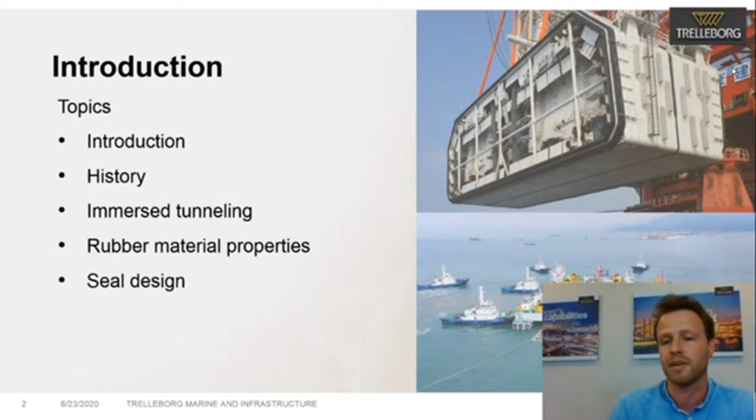So, Trelleborg Group is quite a big company. It's the world leader in engineered polymer solutions. It was founded in 1905. It has about 24,000 people working for it. So it's a rather large company. It's represented in over 50 different countries and has over 120 different manufacturing facilities.

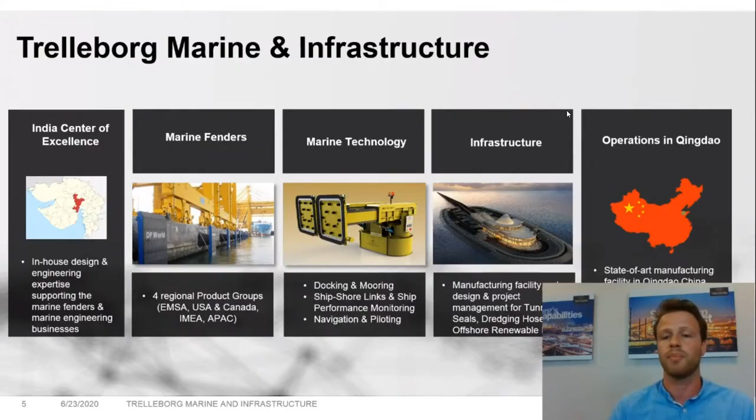I'm not sure what your geographical knowledge about the Netherlands is. That's why I showed a big map of the country. And the company of Trelleborg Ridderkerk is located where the big red arrow points at. It's basically located at the perimeter of Rotterdam. And the business it entails has to do with immersed tunnels, underground construction, energy, dredging, water management, and noise and vibration businesses. So we have been here already for more than 140 years,

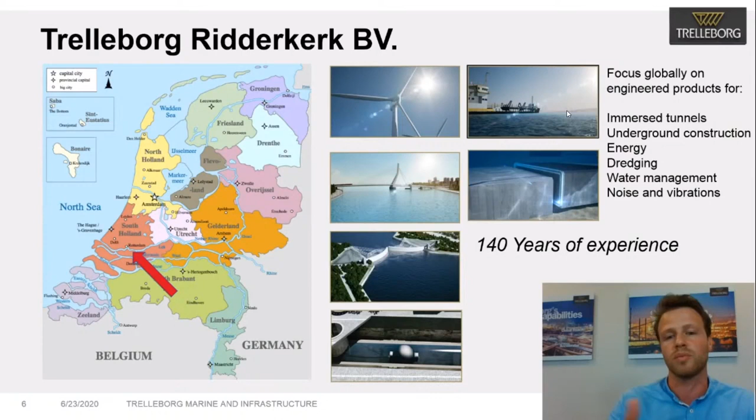so we have quite a lot of experience. And on these pictures you can see some key projects we've been involved in. So that is, for example, immersed tunnels on the right side, the storm surge barrier, and you can see the Erasmus bridge where we created the bearings for.

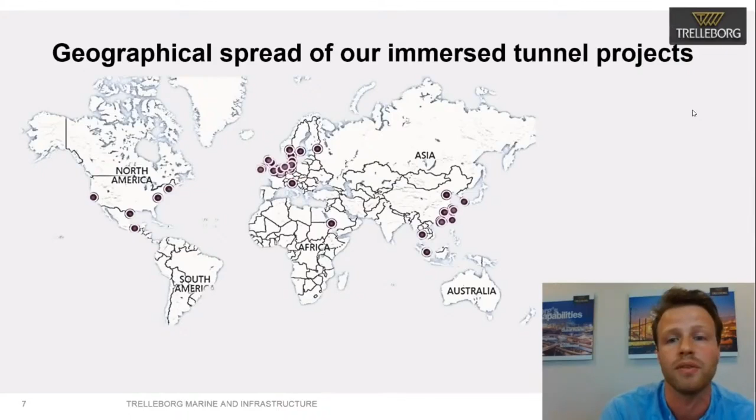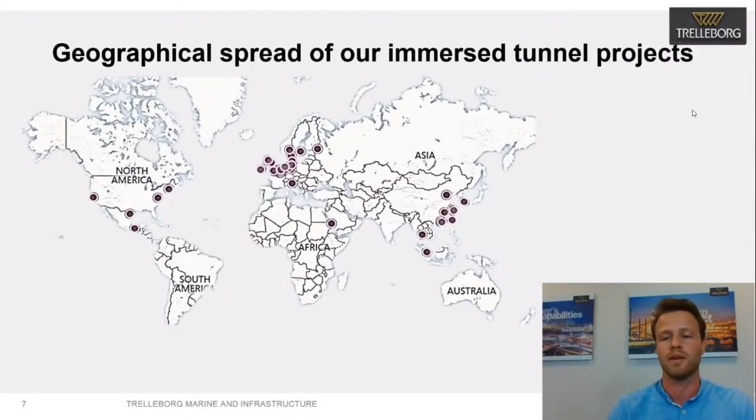The immersed tunnels we have been part of, that we actually delivered our products for, can be seen in this geographical spread of the immersed tunnel projects. You can see that there is a large concentration of immersed tunnels happening in Europe, but also in Asia. There's also quite something going on over there. And we see a small concentration in North America. So those are the three major markets that use immersed tunnel technology.

So let's dive a bit into history. It all started out with the Thames Tunnel. I think a lot of people already know about this tunnel, which is quite a famous one. It was the first time that there was a need to build a tunnel under a waterway, which was the Thames. So back in the day, London was a big metropolis.

There was a lot of business going on, and there was a need to cross the waterway in order to arrive at the docks. However, a bridge was not suitable for that application, as it would stop the sailing boats from entering the city. So they needed something else, and that's why Marc Brunel first made a tunnel under the Thames, under a navigable waterway. However, this was still a bored tunnel, so it was still not the beginning of immersed tunnel construction.

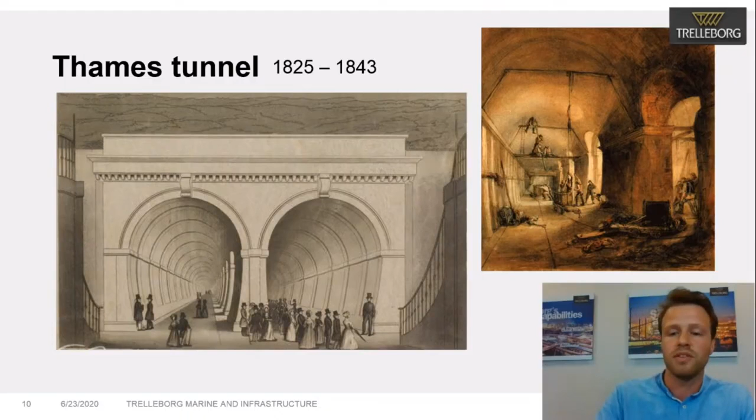That started around the same time, in 1810, by Charles Wyatt. These pictures over here depict it quite well. The idea was to create a brick construction, a brick capsule, and lower that into a trench. The idea was to interconnect those capsules in a row to make one big interconnected tunnel on the bottom of this waterway. However, this was never put into practice due to various reasons.

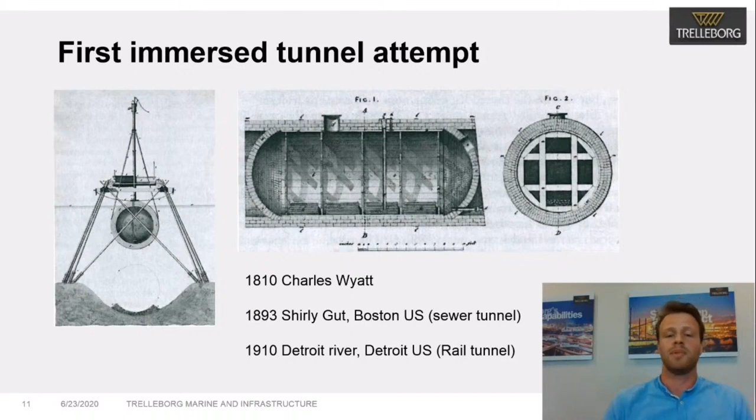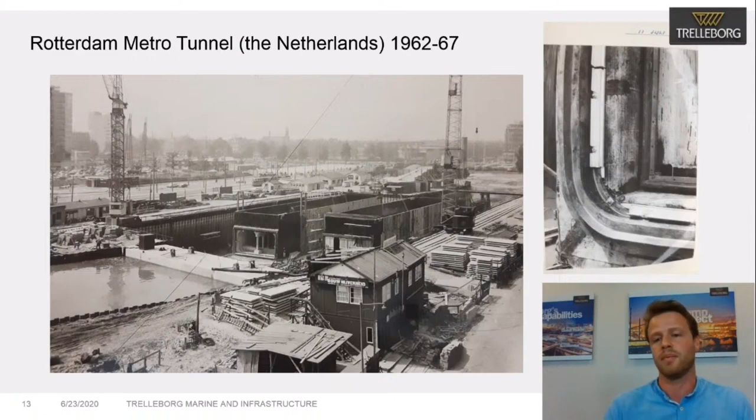The nice thing about the story is that during renovation work, we received some samples of the Gina seal gasket and other rubber products back from the tunnel owner, which provides us very valuable information about the lifetime and the rubber qualities over time when you place them into a situation like this for more than 50 years. So I will come back to this Gina profile and the properties of the rubber material that it has after a certain amount of time.

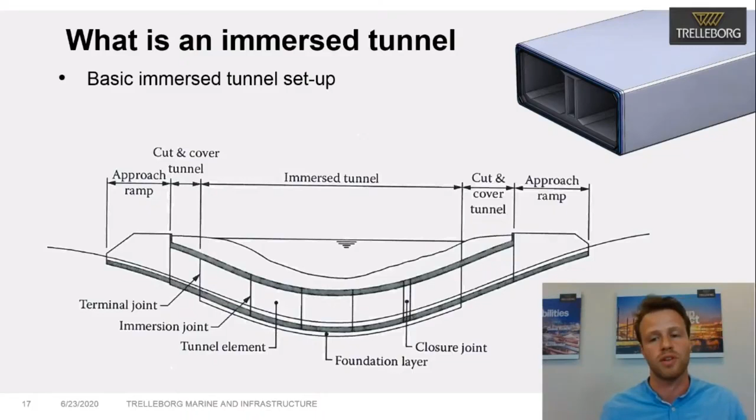At the corners of those cut and cover tunnel parts, you will see a ramp area, and those parts are being interconnected with the existing infrastructure or the infrastructure that's going to be built later on. So now the question arises, why actually build an immersed tunnel? Because there are so many other options to cross from point A to point B, obviously. Well, it depends on what your situation is. But there are a lot of advantages for immersed tunnels that speak for this technique.

At first, it's very suitable for short, shallow crossings in soft soil. Also, the shapes are very flexible in dimensions, because you can just lower different types of cross sections. And if you want to provide a tunnel that has different lanes, you can do that. You can just construct a 6-lane cross section and lower that into the trench. And you can also change those 6 lanes to an 8-lane or less, obviously. That's something that cannot be done so easily with a bored tunnel construction.

Another advantage is the land reclamation opportunities it provides, because you have to suck out land in order to make the trench in which you place your immersed tunnels. This land can be used simultaneously to create artificial ground or artificial islands in the surrounding area. And last but not least, it can be economically very feasible to use this kind of technique. So mostly these techniques are used in areas where there's a lot of water, a lot of urbanization going on, and the soil is a bit softer than usual. So keep this technique in mind when you are designing for these kinds of circumstances.

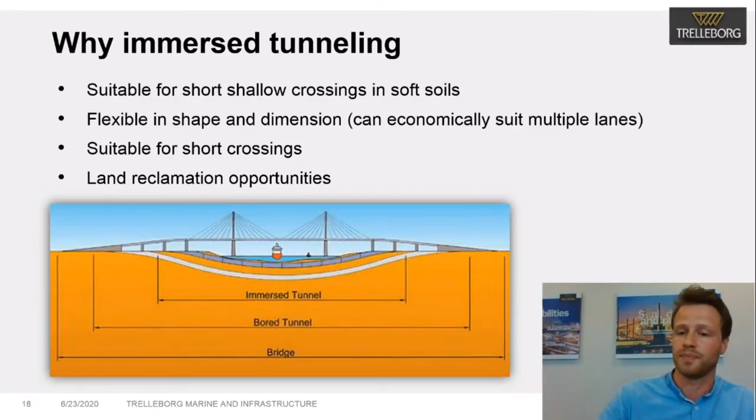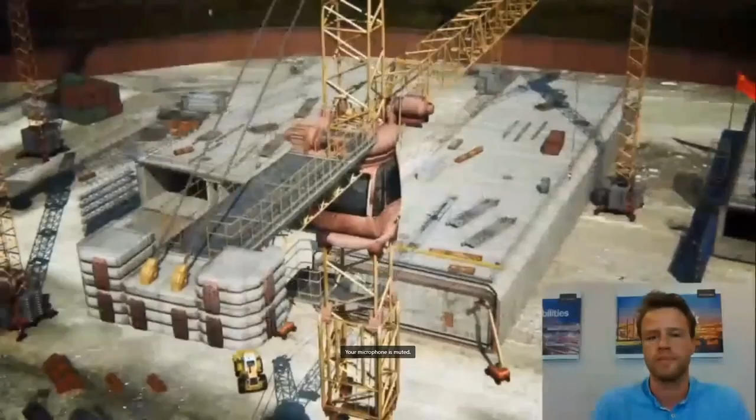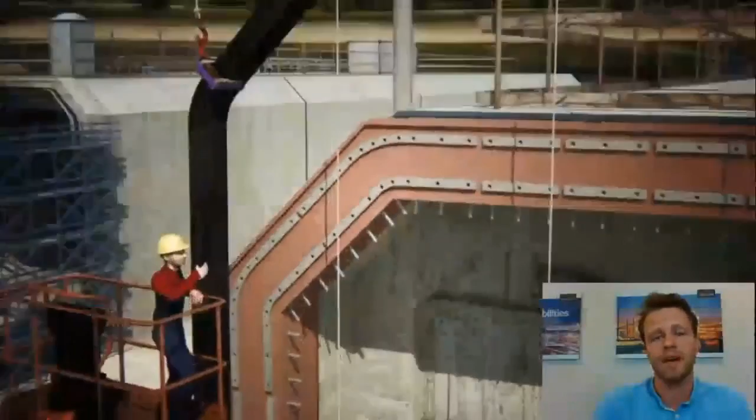Now I will show you a short movie introduction of the immersed tunnel technique that will hopefully clarify everything I just said. So here you can see the building. So the big Gina seal will be installed on the dry dock by clamping it into place. So you will use steel end frames, steel clamping systems to make sure the Gina seal will stay in place. You bolt it down together, provide enough clamping force in order to make sure it stays in place.

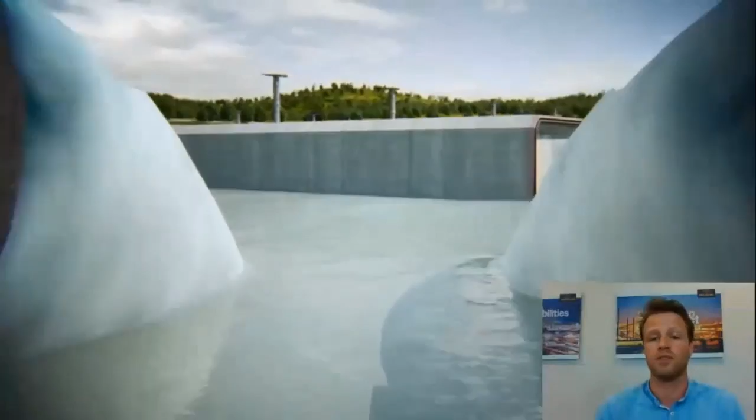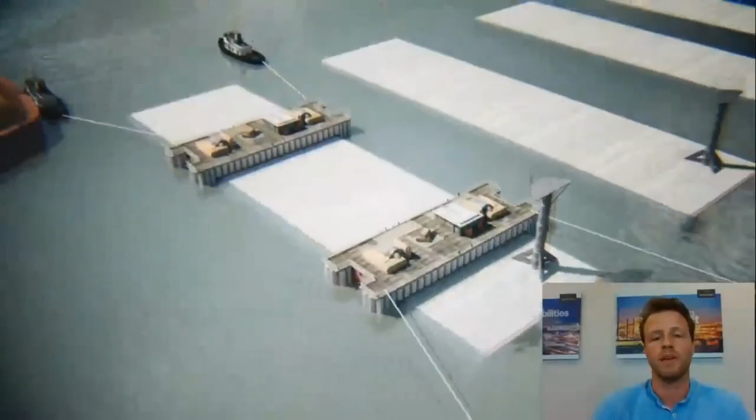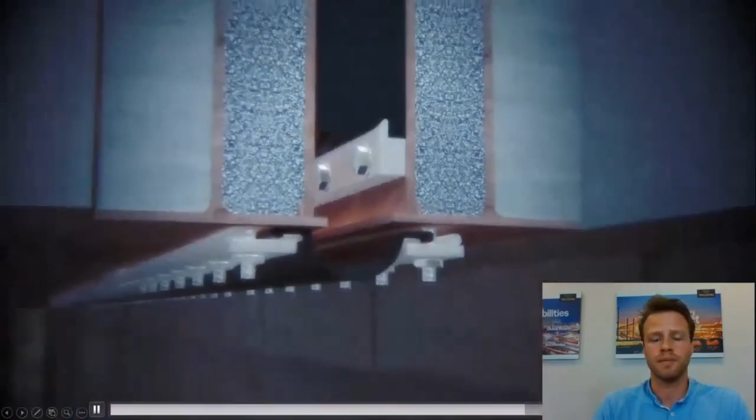So here you can see that, obviously. There is more compression. Now we can see the omega seal being clamped into place, which is basically the secondary sealing solution. And many more are to follow. And when everything is done, you will see that an infrastructure is being created.

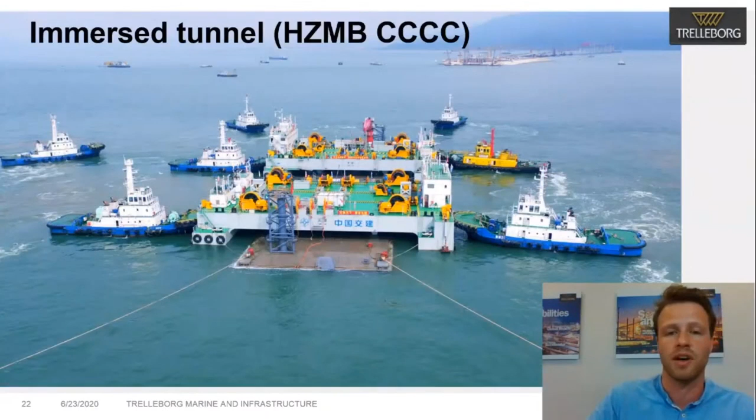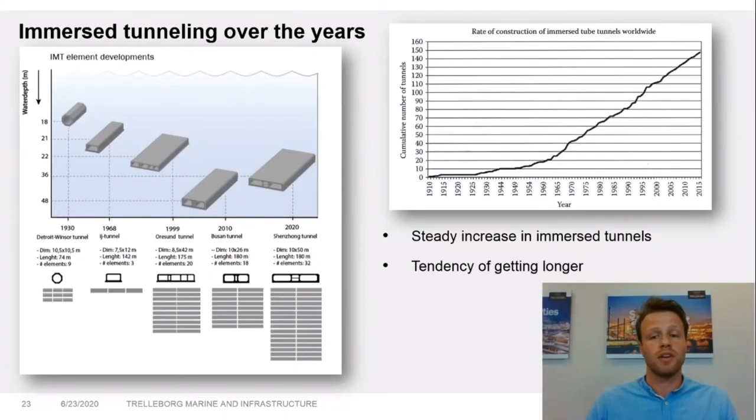So what can we see about immersed tunneling over the years? A lot of trends are being recognized at this moment. On the left side, you can see one of the first immersed tunnel elements constructed during the Detroit-Windsor tunnel connection. They tended to be way smaller in size, but also in number, because when you would cross such a waterway, there were a limited amount of elements being interconnected. But nowadays you can go as long as 32 different elements, and those elements tend to be wider, longer, and higher as well. At the same time, we see a steady increase in immersed tunnels. On the right graph, you can see a very linear progression in terms of new immersed tunnels.

So there are different types of immersed tunnels, because at the Detroit-Windsor tunnel we saw that the first immersed tunnel was a steel tube type of immersed tunnel. But in total you can say that the concrete monolithic type of immersed tunnel is way more popular. It entails more than 50% of the total amount of immersed tunnels. And this technique is mostly used in Europe and in certain parts of Asia as well. It kind of depends on what the requirements are. Sometimes political pressure is also of huge influence in the decision making for these different structures. You can imagine if you're living in a country where the shipyard industry is very big, that there is a big lobby to make these immersed tunnels with steel shells.

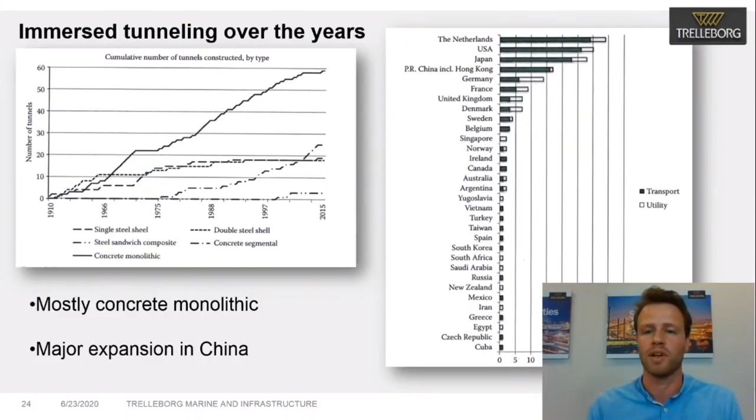Sometimes things go wrong when you construct immersed tunnels. That's obviously not something you want to happen, but calamity is not a stranger to us. We have experienced different types of calamity in the past, and we do not run away from it, but we like to learn from those mistakes.

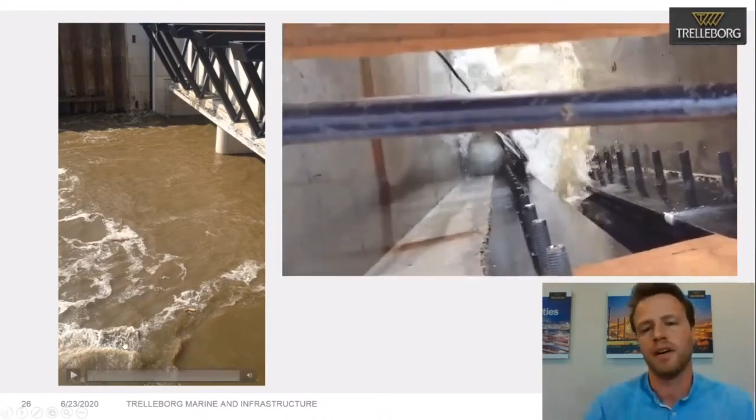So here you can see my colleague, who is in a building construction, and an inflatable type of seal was not performing anymore. So the whole construction site started flooding with water. There was just a combination of different things going on at the same time. Yeah, hopefully nobody got injured that day.

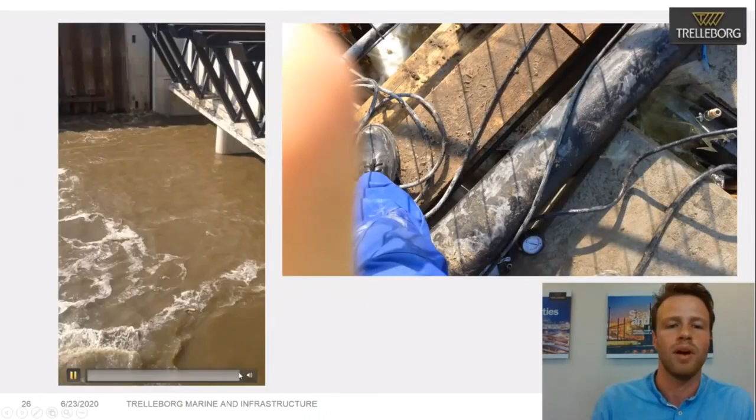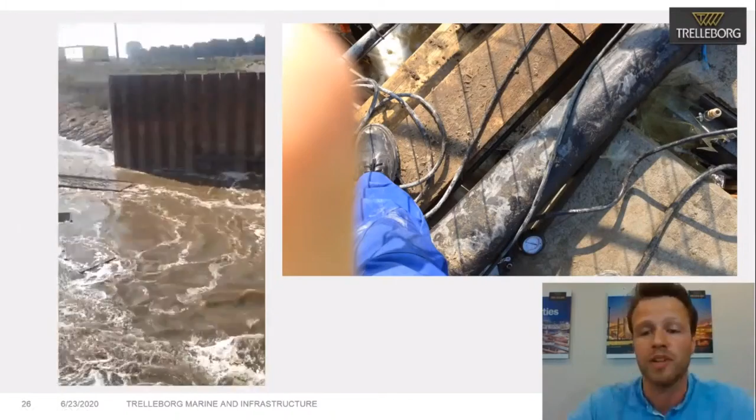However, this obviously has a lot of financial consequences when something like this happens. Eventually, everything worked out fine. We worked together with the contractor and the other parties involved and found the best solution for this small disaster, you could say.

Calamity is also not a stranger back in the days. During the construction of the Thames tunnel, there were 6 different floods. During the second flood, there were even 6 deaths reported. And there was a lot of skepticism back in the day, whether it was even possible to cross such a navigable waterway. Fortunately, people just continued pursuing this type of technique. So that's the reason we are here today with the tunnels we have these days. So we should be grateful for that.

So we talked a lot about steel and concrete. Now let's see how rubber fits in this whole story. When you design for immersed tunnel projects, there are a lot of different environmental impacts that can have an influence on your joint design. At first, for example, when you start building an immersed tunnel in a high seismic area, for example in Istanbul, you have to take into account that there can be a lot of dynamic activities influencing your seal. So you have to make sure those tolerances are lined up with your design.

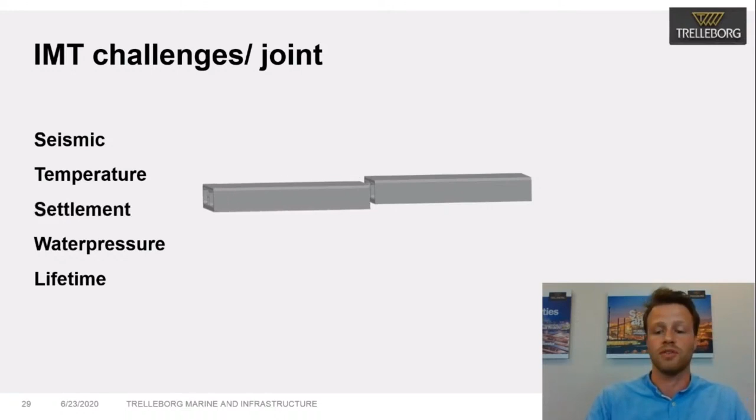Also, when designing with concrete, those elements tend to expand and retract over their lifetime, which are also tolerances you have to accommodate in your design. Ground consolidation over the years has a huge impact on your joint design too, and at the same time you will have water pressure that ranges from high tidal pressure to low tidal pressure during its lifetime. When you design a tunnel for 120 years, you can imagine there's a huge range in water that it has to accommodate. As I mentioned, a general lifetime lies between 100 and 120 years for these kinds of tunnels. It depends who the tunnel owner is.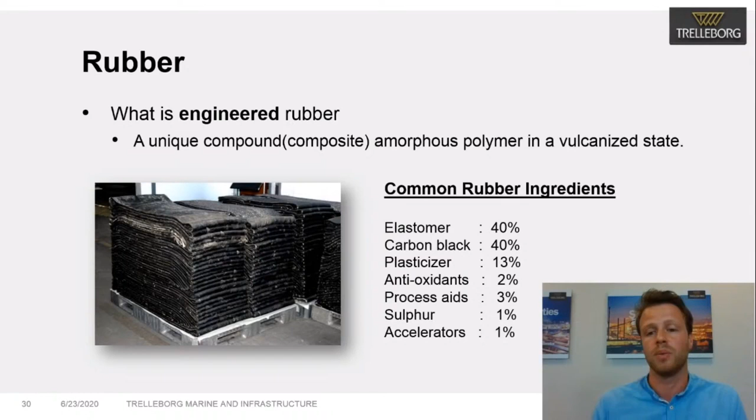Sulfur is needed to make sure everything can be vulcanized. It basically functions as an accelerator, but you can combine it. It's basically a recipe for the things you want to build. If you want to build a rubber that's resistant against ozone, you probably need different ingredients. If you want something that is resistant against oil or gas or something else, you will need a different type of recipe to come to the right compounding.

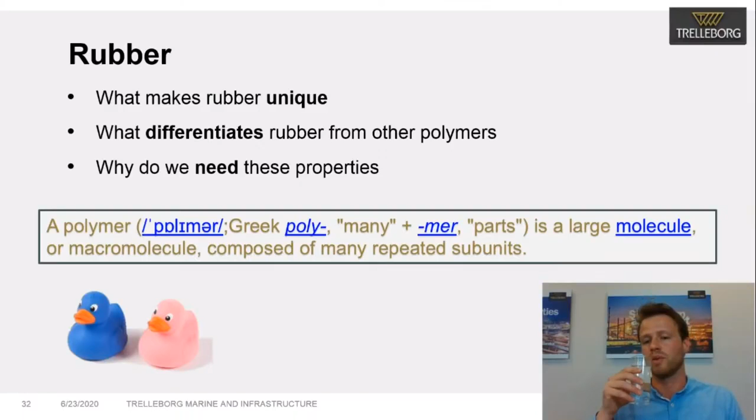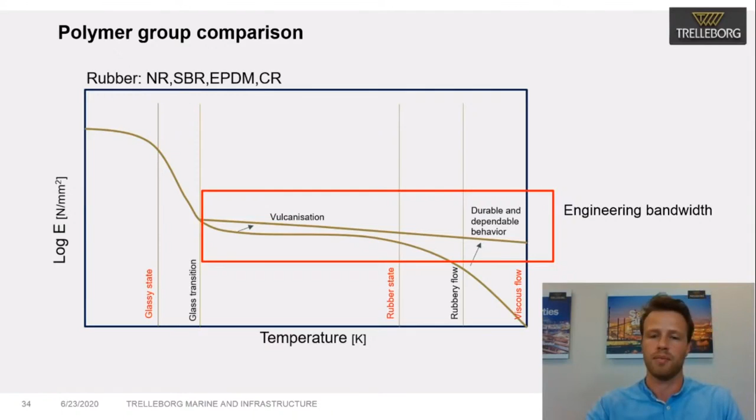So here you see the engineering bandwidth of a vulcanized piece of rubber. It's quite a big range. And there are also some other rubber characteristics you have to take into account because it's a very unpredictable material at the same time, which means it's a viscoelastic material. In other words, it does not behave like Hooke's law. That makes it at the same time very difficult to perform FEM analysis on, for example.

A few of those material characteristics are being displayed over here. On the right side, you can see the hysteresis happening in a rubber material. If you see that the stress rises at P0, it starts rising to P1. And then when there is an unloading of your compression, you see that the stress and stretch ratio differs. So the energy is being dissipated within the material.

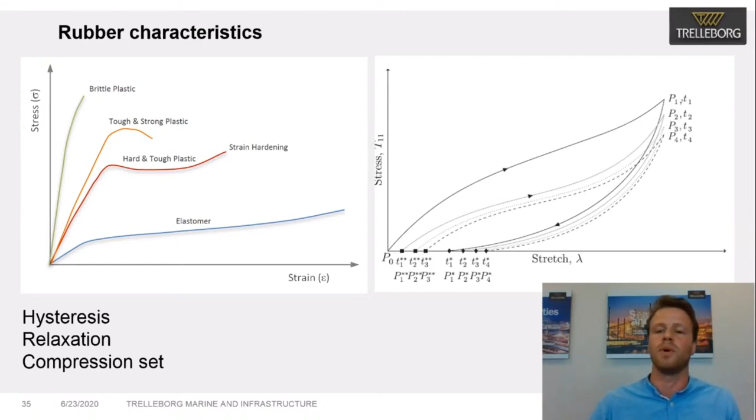The compression set is also something that influences the material of rubber, which means if there's a dynamic compression of the material, the rubber does not go back to the same position it originally would reach, which means the material behaves differently than originally was anticipated. Also, relaxation takes a huge part in its unpredictable behavior, which means when you have initial compression of your Gina seal or another type of seal, the stress will lower over its lifetime. So those are all different types of characteristics you have to keep in mind when designing for these kinds of purposes.

We have, for example, the NEN standard in the Netherlands, but you also have the DIN standard in Germany. You have the GB standards in China. They're all different, and you can play along with that. So if, for example, one manufacturer of seals complies to certain parts of norms, in order to compete in the same business, you also have to comply to their standards. So you can say it's a quality assurance tool, but also a strategic tool at the same time.

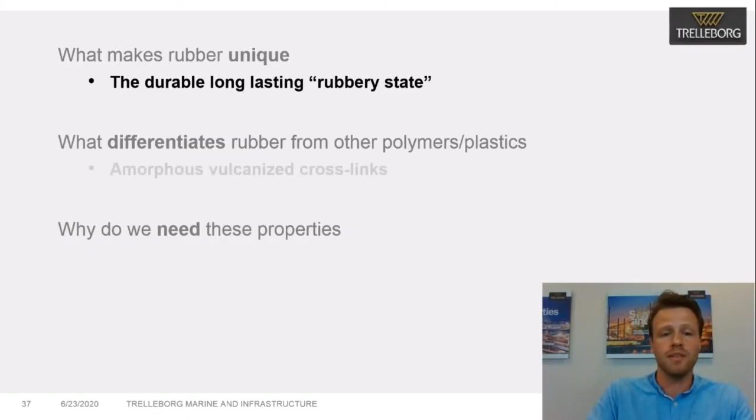A small recap. So what does make rubber unique? It's mainly its durable, long-lasting rubbery state that is being created due to its amorphous vulcanized crosslinks. And that will create a very dependable, very predictable, reliable building material that can be used to make these concrete steel constructions watertight for a very long time.

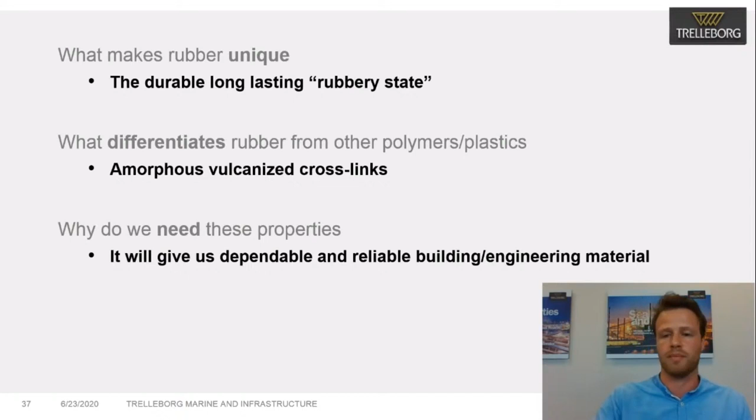So it's time to get a bit more practical. As I mentioned before, those tunnel elements are being constructed on land, and they will be lowered into a trench. So on this picture, you can see tunnel element number 1, tunnel element number 2, and number 3 as well. Those small vertical lines being displayed are the segment joints, and the bigger one with a red dot around it is the immersion joint. If we zoom in a little bit more, you can distinguish 3 types of seals, number 1, 2, and 3.

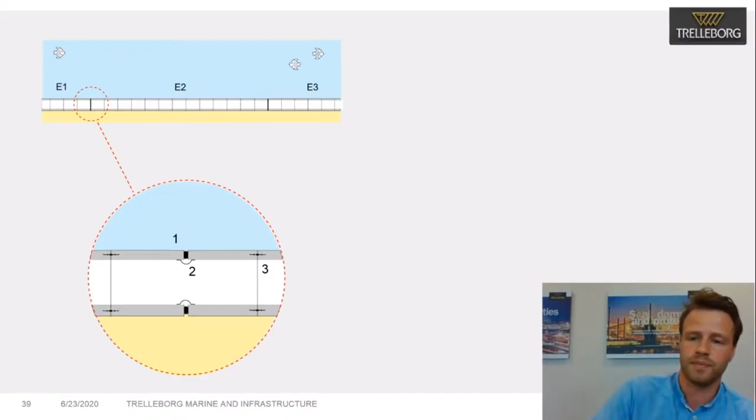So we have the Gina Profile, the Omega Profile, and the water stop. Maybe you can give one to me. Yep, here we go. So this is one of the big guys, the Gina seal. We have a membrane seal, so this is basically not a compression seal. This seal will be constructed on the inside of the tunnel construction.

Then, number 3 is the water stop, which is a joint you will pour into the construction, so if you construct it well, it's not visible at the end anymore.

Yeah, nice, what's that? For at home. Yeah, for at home, exactly.

It's a smaller version of this Gina Profile. As you can see, it has a tiny hole in it as well. That is meant so you can produce it easier due to less vulcanization time. And at the same time, you will create easier initial compression because it behaves differently, obviously.

So the Gina Profile, the big one. You can see that the Gina Profile started out rather small and developed over the years. So you can say it becomes bigger and fatter over the years, just like human beings. And it actually follows the same trends as immersed tunnel construction. You already saw that immersed tunnels were getting wider, longer, and deeper, and the Gina seal design follows these trends.

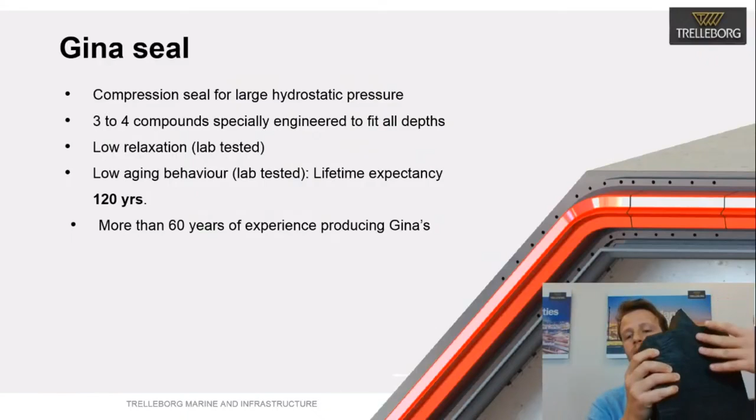So the Gina seal basically contains multiple types of compounding. The Gina over here looks like one big part of rubber. However, the nose often has a different, lower type of compound than the body. And the flange often has the highest type of compound because you want it to be hard to clamp it in the right position, whereas the nose is lower in shore hardness to create a bigger compression during initial compression.

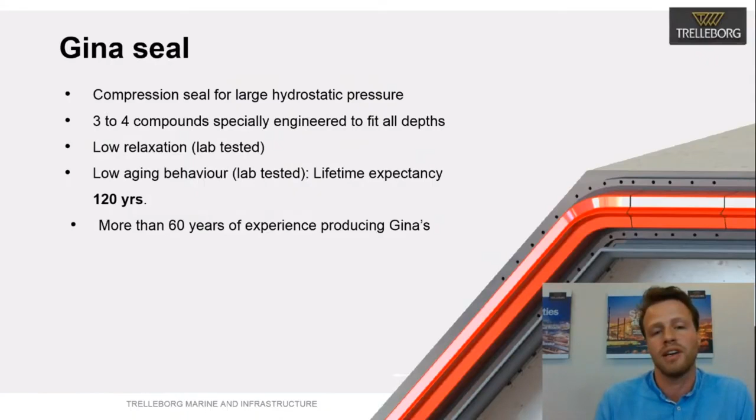So we have 60-year-old samples of Ginas, which is useful, obviously. And we design these compounds with low relaxation because that has a huge influence on the performance of these seals.

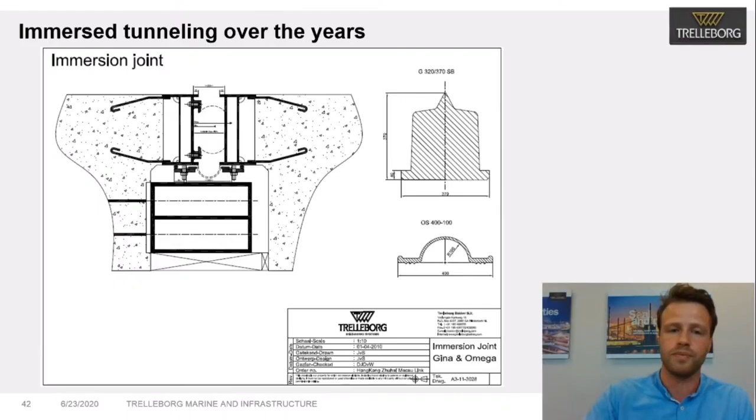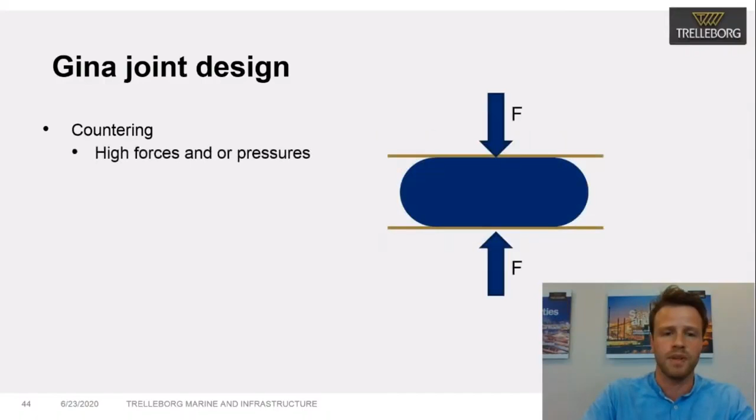So what does the Gina seal need to do? At first, it needs to accommodate a lot of compression, high forces and pressures. Then you have large transition movements that have to do with the settlement I was talking about, so these side deformations too. Apart from that, there's a lot of durability and environment that it has to deal with.

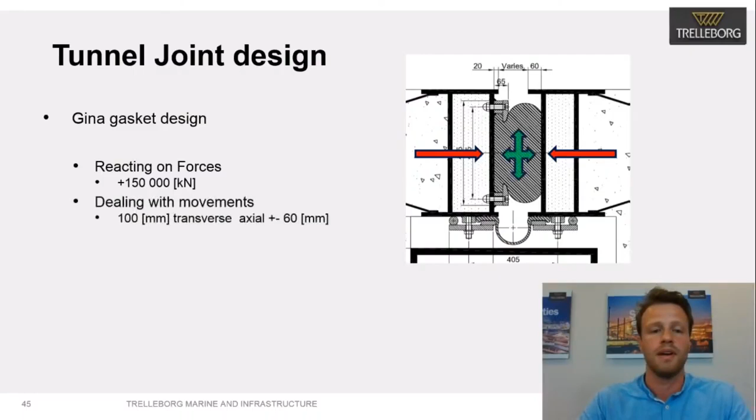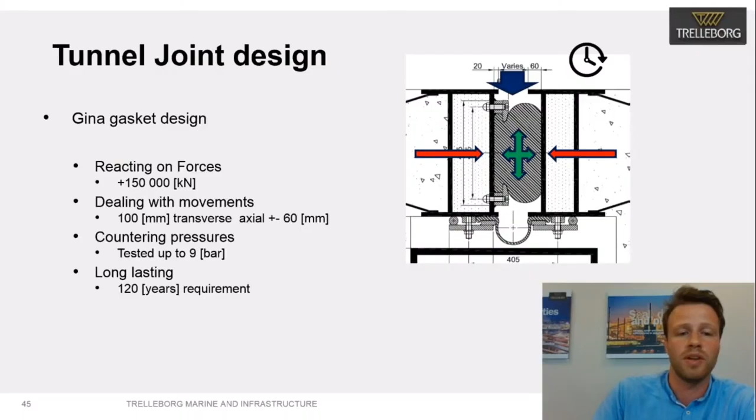So to put it into perspective, these are typical forces you have to deal with. We're talking about 150,000 kilonewtons of compression that it has to take. It needs to deal with about 100 millimeters transverse axial deformation, mostly due to settlement. And we have tested these seals with pressure up to 9 bars. We never reach 9 bars; the deepest immersed tunnels mostly range between 20 to 45 meters in total. Last but not least, the lifetime requirement.

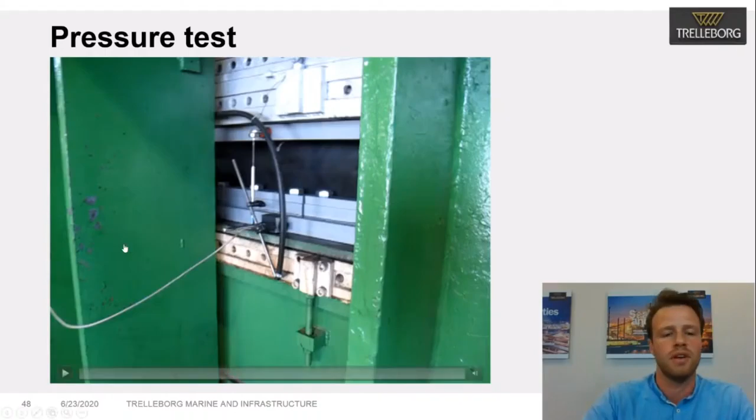So on the right side, you see a press. The Gina mock-up is placed under the press, and it's compressed by the amount of compression you want to have. Within this construction, the pressure will start getting higher. In the meantime, the pressure builds up in this construction, and the small leakage is visible.

And there it goes. So as you can see, a lot of force is going on when there's a leakage occurring. So that's definitely not something you want to stand in front of.

So this is another type of compression test. The one before is just a regular one where you compress the seal in the axial direction. However, in this situation, for example, the client created a different type of steel end frame in which the plate was slightly tilted. So in this construction, we did the same type of performance test. We create documentation to accompany this type of tests to give comfort to the client.

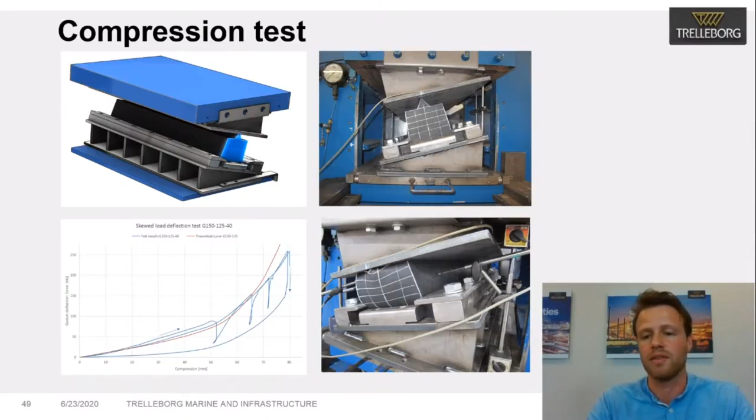So you can imagine you can create all different types of setups and ranging types of tests to make sure that you deliver the right product with the right validation accordingly.

So the Omega seal, as I mentioned, is a secondary seal. It's not being loaded due to compression; it functions as a membrane basically to cover up the joint. We also have 60-year-old samples for these types of Omega seals due to renovation works in Rotterdam. So that gave us a lot of information on how that particular seal was performing over the years. And we tested the seal for over 20 bars of force.

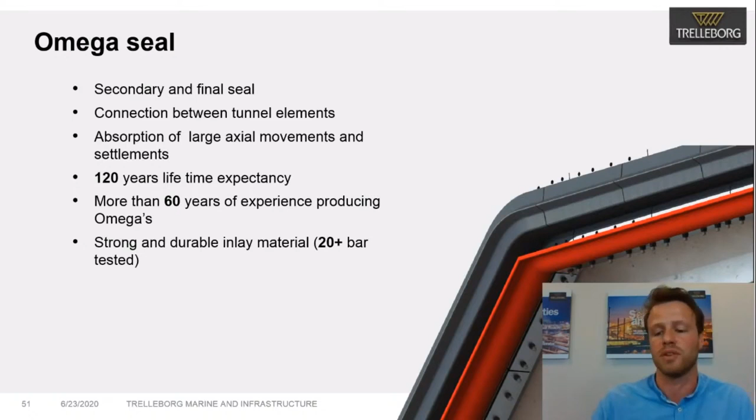So here you can see a typical cross-section of the Omega seal. On the graphic below, you can see the Gina seal being compressed, and the Omega seal is clamped in place later on. So what most of the time happens is that those anchors are already pre-installed on site, and when the Omega seal arrives on site, you only have to clamp it in place, and you have to determine what the clamping force needs to be to make sure that the Omega seal will perform accordingly.

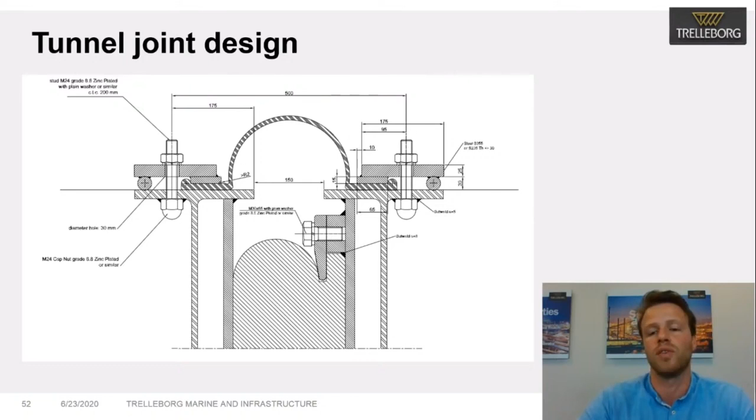And during the tightening of those bolts, you have to take into account the relaxation. So most of the time you have to retighten them after 10 days, after 2 weeks, and then most of the relaxation behavior is taken into account.

So those Omega seals are sometimes tested as well, especially when you create a special type of Omega seal. This is a type of construction you can use for that. You basically place 2 Omega seals next to each other, and you increase the pressure within those Omega seals to check where the failure mechanism is and to check how the clamping system behaves over time.

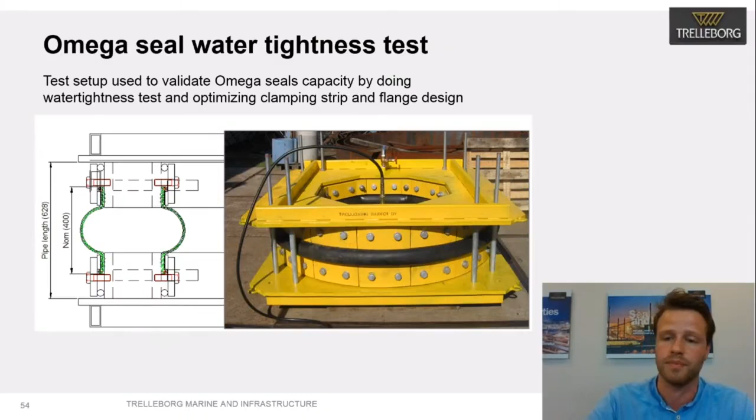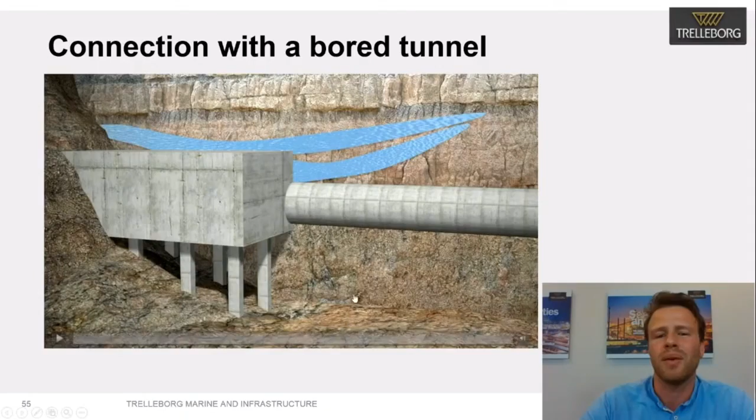I'm aware that in India there are not so many immersed tunnels happening. However, Omega seals can also be applied in different types of constructions, for example, in a station box tube connection. It's a very useful tool. So basically for very weird, complex transition areas, an Omega seal will perform very well.

Right. So the omega closure joint, that's a special type of seal. You don't see that often, to be honest. So in this case study I'm showing over here, we had to make an omega seal that had to cover 1800 millimeters in order to deal with the tolerances it provided.

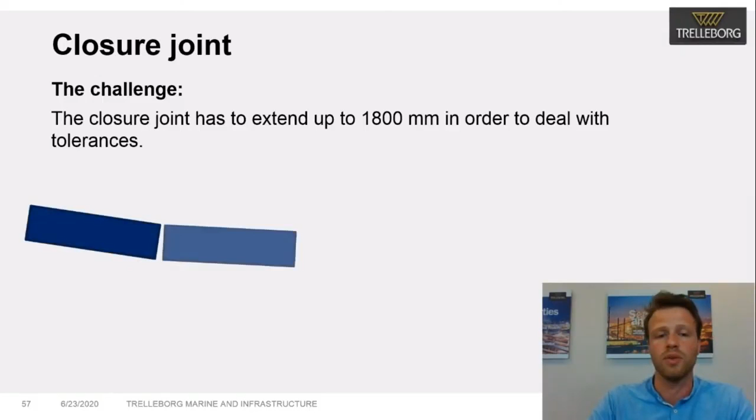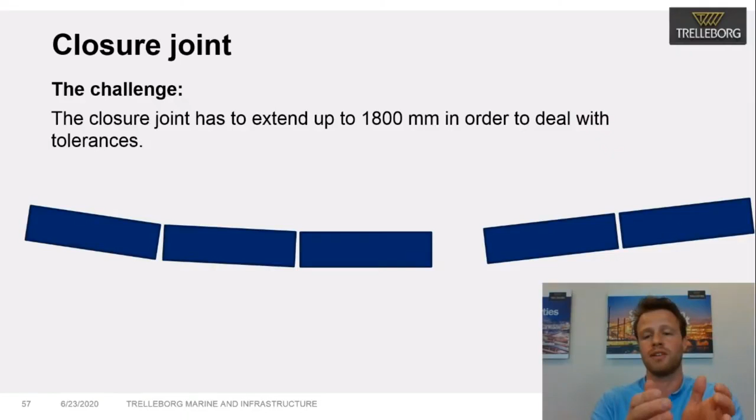So how does a closure joint work? When constructing an immersed tunnel, you will lower the elements accordingly. However, at the end, you will see that there is a stack up of tolerances that you are not sure about. And what happened in this situation, the client created a closure joint that could be extended in order to make everything fit, which is shown over here. This was the closure joint being constructed.

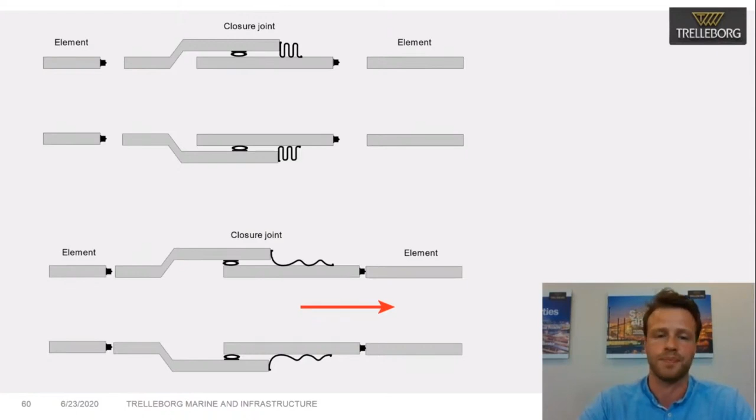And it needs to be rather long to make sure it can cover the movement of the moving structure. It was quite challenging for us as well to create these type of seals. Here you see the production of two different type of M seals. On the left side, you can see the bigger one, which in total was 1800 millimeters. On the right side, you can see a smaller version of that.

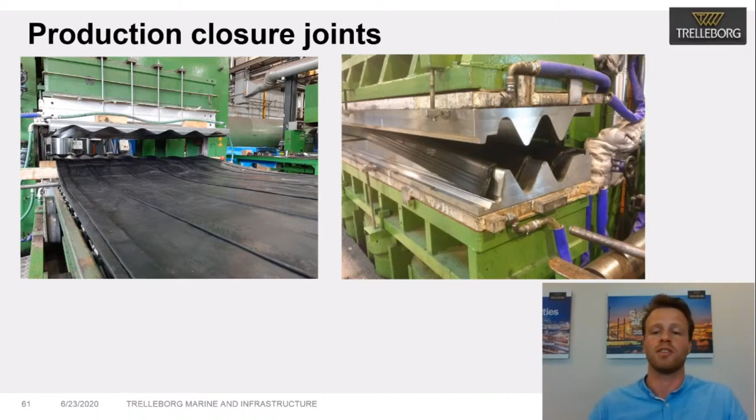So the sinus shape is meant to create the harmonic movement, but also production-wise, it's useful because if you can minimize the total width of the mold, you can minimize the costs. So that also works. So you create those sections ranging from 5 meters to slightly bigger, and you have to vulcanize those sections into place. So you will end up with a very, very long linear length of this seal, and then you have to vulcanize the corner sections to those linear parts.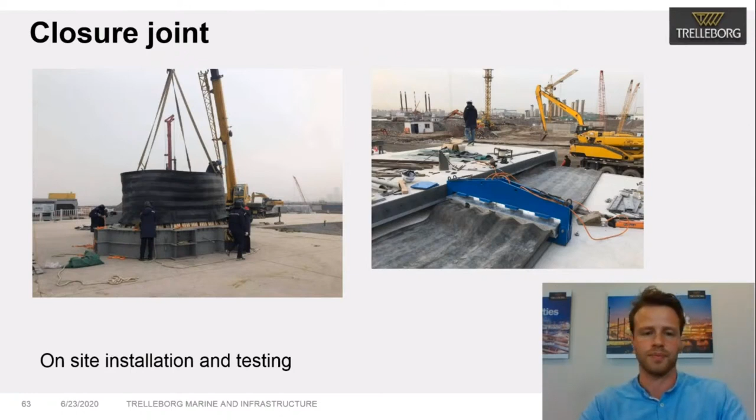At last, we have the cast-in seal, which is called the water stop. And the water stop is being displayed here in red. Normally it's not red, it's obviously black with steel. It's been poured into place. This type of water stop is tested up to 9 bars and has the same type of lifetime requirements as the other seals. And those seals are used where dilatations are required.

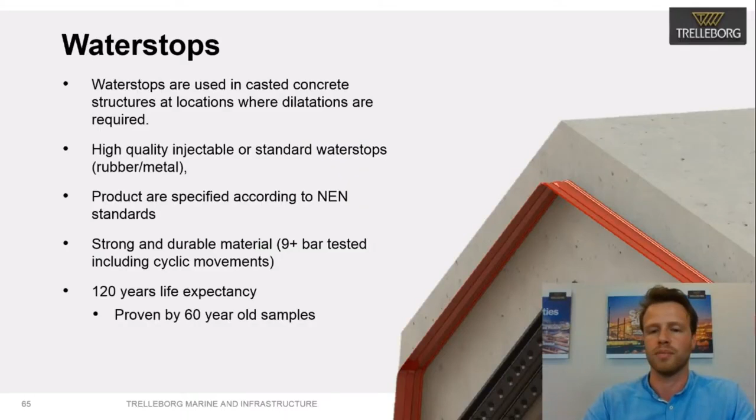So the worst case scenario of an immersed tunnel is often seen as a sinking ship. So when the ship goes down and lands on the immersed tunnel, you definitely want your structure to accommodate those movements in your tunnel. So this is the working principle of a water stop. You pour it in on one side, and after it cures, you pour the other side as well.

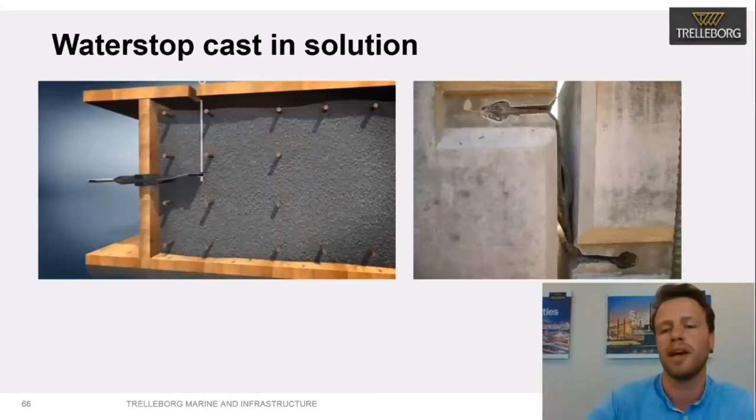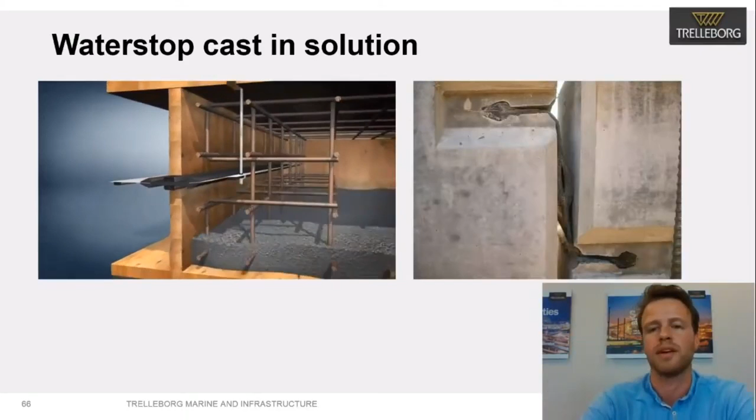On the right side, you can see that the water stop can accommodate a lot of shear movement too. This is definitely not a normal situation. In this situation, one of the elements started floating. So that's the reason why there's so much differential movement visible. This is definitely not something that's required or wanted. However, you can see how versatile the material is and that it can work.

Oh, what happened here?

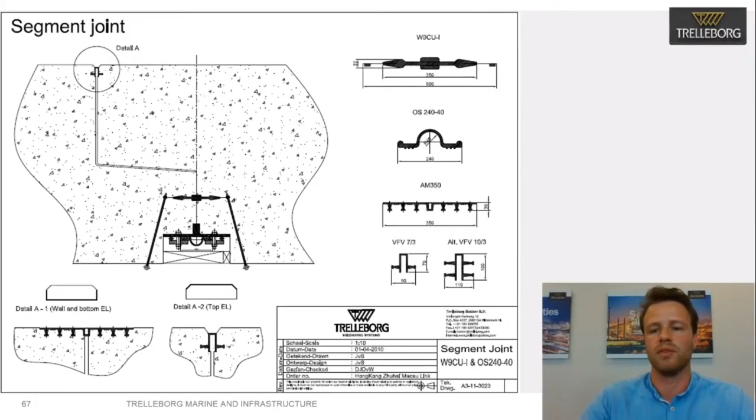So here you see the cross section of a typical in situ situation. Here you see the segment joint. On the lower part, you can see an omega seal being clamped into place. And as a secondary seal, you see a water stop being sunken in. It also often has other types of seals accompanying it. So in detail A, you see a smaller seal that makes sure the dirt cannot enter the seal. So there are a lot of different options you can use here.

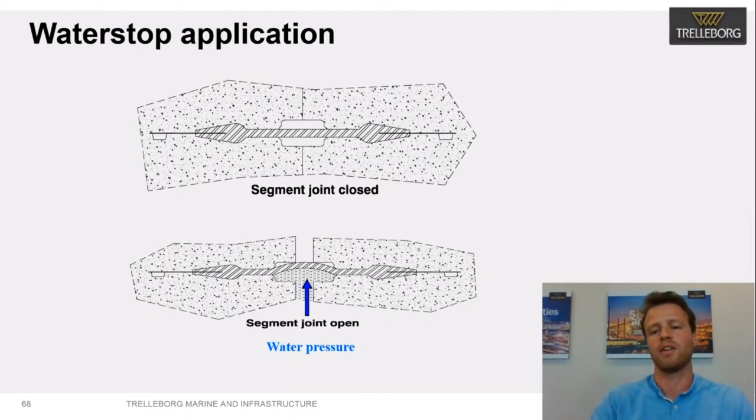So for the water stop application, this is what basically happens. You pour the water stop in, and when there is a movement, so for example, when the concrete starts expanding or retracting, you will create a small joint opening in which the full rubber material starts to create an arch shape due to the water pressure in that direction. So the water pressure causes this arch forming, and it results in a reducing radius and thus also in stress decrease in the material, which is useful. That's something you want to have.

With the water stops, there are some challenges involved, obviously. One of those challenges is the transport and installation of these types of products, because they're rather fragile when you roll them up in a reel, and when you have them placed in the construction site, they're easily torn, for example. You have to make sure that doesn't happen. Also, air entrapment is an issue. So when you place them inside, air gets under those constructions, and you can have air entrapment and small cracks. So we'll get back to that a little bit more later.

During the concrete expansion and shrinkage, you have a lot of elongation, also tensile strength within your water stop. As you also saw in the last visual, sometimes there's settlement going on, and you don't want your water stop to tear at that point. The rubber-metal bonding is also of importance. It has to do with the tensile strength that acts on this water stop, and you don't want your rubber rupturing from your metal.

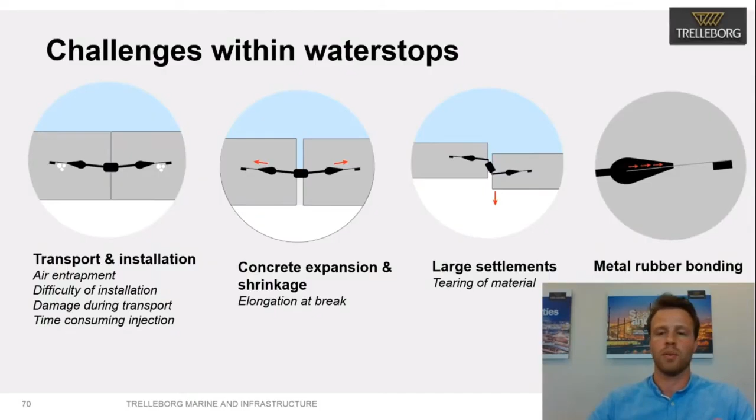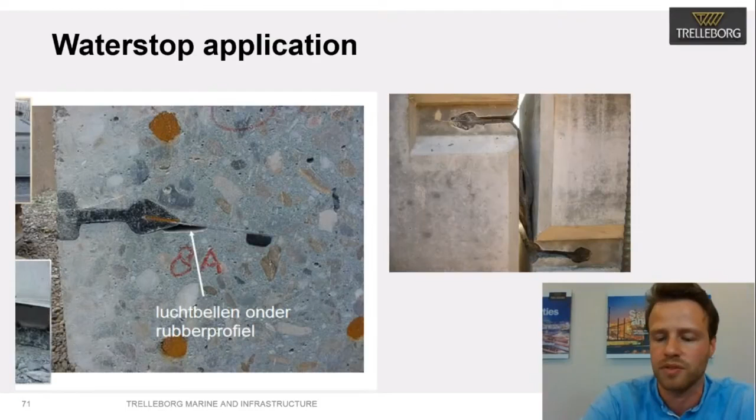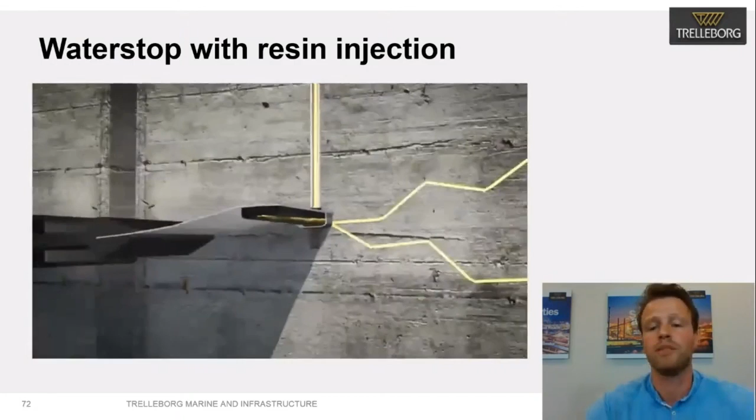So here you can see an example of air entrapment during the pouring of such a water stop, and you can see an example of how a water stop can deal with these types of settlements. There is a solution to make sure air entrapment and cracks do not affect your water stop that much. So here you can see the injection system with resin. What happens is that you pump with 10 bars an amount of resin into your water stop, and that resin flow will follow the path of least resistance, and thus fills up the cavities that can occur.

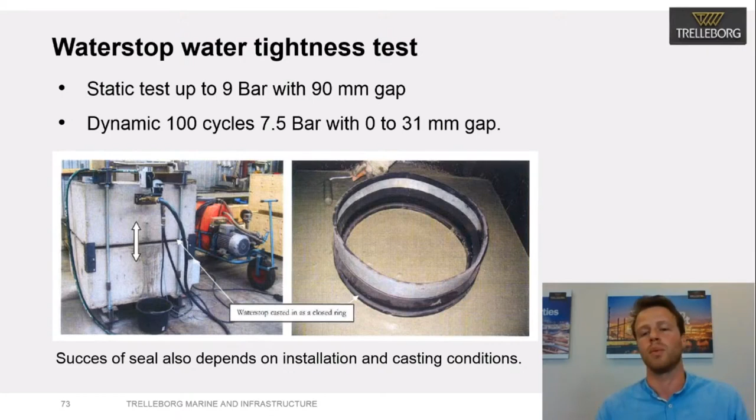Water stops are also tested on how they are performing. So we did dynamic cycling tests and static tests up to 9 bar. What we did is we poured these water stop rings inside concrete blocks, and we performed different ranging movements while also increasing the pressure up to 9 bars. And we wanted to see what the failure mechanism was and when it started leaking.

So we are currently developing our water stops because, as I already mentioned, there are some difficulties with the injection possibilities. So one of the developments we are working on currently is the implementation of more injection possibilities. You can imagine if you pour in a certain amount of resin at the beginning of your tunnel lifetime, you might encounter cracks later on. So we want to provide the extra opportunity to inject an amount of resin within the water stop, for example, after 20, 30 years.

Another thing we want to take into account is the flexible injection hoses, because the current systems are rather static and difficult to handle. So if we could change that to a flexible option, it would be way more workable and easy to do the installation. Also, fewer injection locations would be beneficial, as it would save cost and the injection time would be limited, which is obviously something that would be needed and wanted.

So to do a small recap, immersed tunnels are very suitable for short, shallow crossings in soft soil. That's something we discussed at the beginning. Some trends are visible in this world. Immersed tunnels are getting larger, they're getting wider, they're getting deeper. And sealing products such as Gina seals, Omega seals, and water stops tend to become larger as well. They're just following the trend of the concrete constructions. And rubber is a very reliable, versatile material that can be used to build tunnels in combination with concrete and steel. So those are the 3 main messages I would like to share with you today. I hope that was all clear to you.

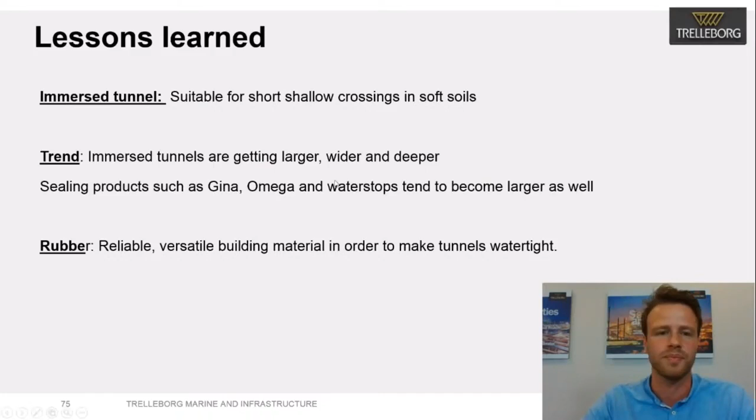Thank you, Nicas, for a wonderful presentation. It was really exciting. Thank you, Sandeep. So I would take a few questions from the audience now. Yes, we already received some questions, quite nice ones. But before that, Nicas, thanks for presenting. Very clear.

I also have a question. Of course, we know each other already for a while, and you've started in our company, in my case I would say recently, maybe for you it's already a long time. But like everyone else, rubber is not something that's been taught in universities or in schools much. It has always been some kind of an alien material, unknown. And now you've been working with it for over a year. How has your idea of rubber changed? Has it changed, and do you think it's an underappreciated building material?

Right. I can imagine when you've graduated from university, you definitely don't learn so much about rubber. That also has to do with the fact that it's so difficult to calculate with. It's way easier to calculate with steel or concrete because it's quite predictable. So I didn't know much about it. What I learned most is that it's really important to have a lot of knowledge and experience with this type of material. While using this material over the years, you get more acquainted with it, and your knowledge starts improving. So that's something I learned the most.